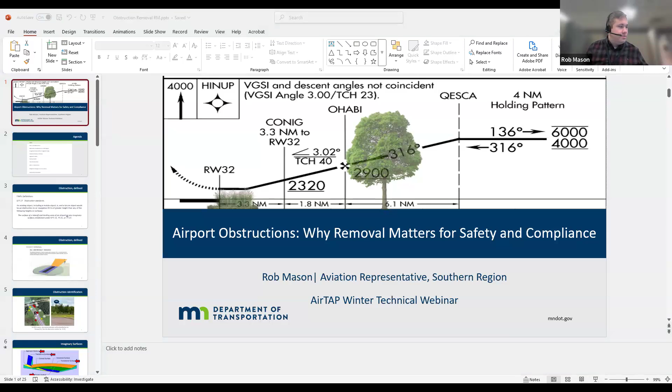So thanks everyone for joining. I'm Rob Mason, the aviation representative for the Southern Region here at MnDOT Aeronautics. I joined MnDOT in June of '24. I'm coming from about 10 years in the classroom as a high school teacher, both in St. Paul Public Schools and at Eagan High School, part of the Eagan-Apple Valley-Rosemount School District, where I taught aviation to the junior and senior level, as well as a freshman course on aviation exploration. So education is a huge part of my background and my journey.

As a pilot myself, it's been a journey of discovery, especially as we get into obstructions. I'll talk about that here in a moment, but super happy to be here. And if you have any questions anytime, drop them in the chat. We will get to them as best I can after the presentation is over.

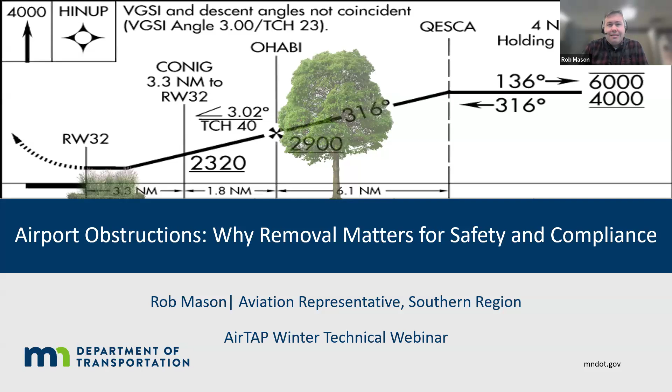So our subject today is on airport obstructions, why removal matters for safety and compliance. I creatively put an instrument approach plate up there with some trees and brush on the approach, because that's what we're talking all about: how to remove these obstructions, the importance of removing them, best practices and how to do those. We'll look at some case studies as well.

So a little agenda here before we get going. We'll talk about what exactly is an obstruction, defining it both in the FAA's terms and for us at MnDOT Aeronautics. We'll talk about how you identify obstructions on 5010 reports that airports receive, the imaginary surfaces and Part 77 approach types, collection methods, and the process we follow at MnDOT Aeronautics when we come out to your airport to visit and conduct a 5010 inspection.

We'll talk about the approach surface, the primary surface, the transitional surface, specific effects of obstructions, and mitigation strategies, as well as a case study and an obstruction control plan.

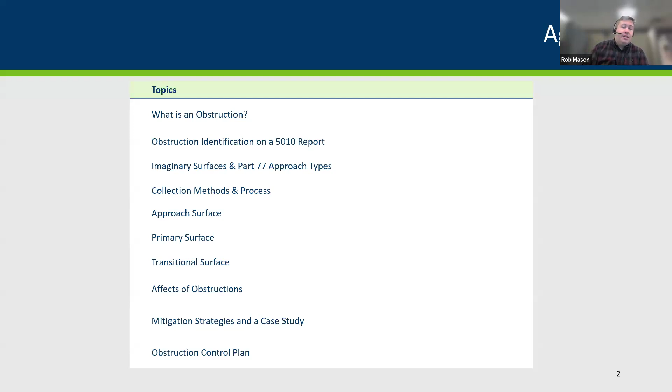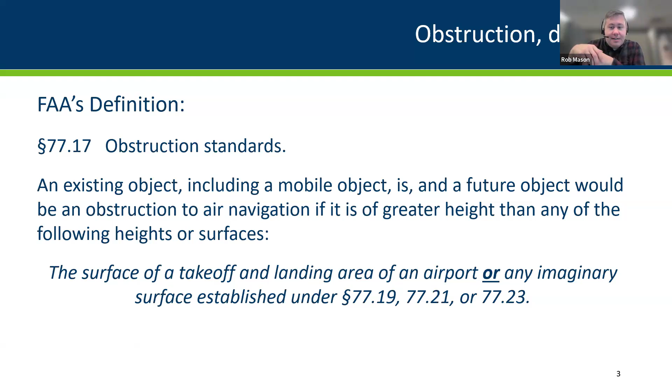So the FAA's definition of obstructions: Part 77 of the FARs says that an obstruction is an existing object, including a mobile object, or a future object, that is an obstruction to air navigation if it is of greater height than any of the following heights or surfaces: the surface of a takeoff or landing area of an airport, or any imaginary surface established under 77.19, 77.21, or 77.23. That's very legalese, so let's think about how we approach it from MnDOT's terms here.

The minimum obstruction clearance, per MnDOT's definition, requires that a structure, a tree, or a mobile object that creates a hazard other than those necessary and incidental to airport operation must not penetrate the imaginary airspace surfaces. If it does, it's technically an obstruction and should be dealt with accordingly. How do we deal with that? We'll talk about that.

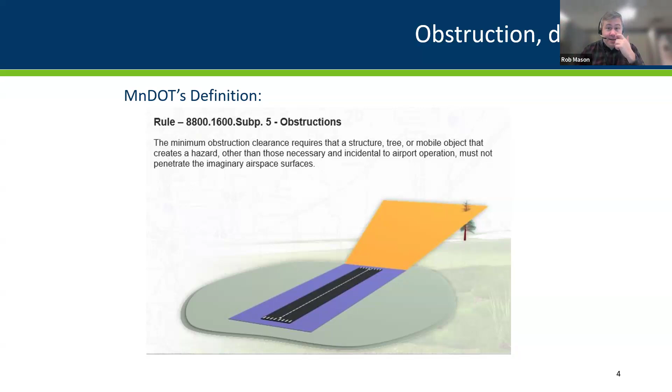To give a little background, I joined MnDOT as a commercial pilot, instrument rated. I thought I was well versed in instrument procedures, and then I got here and realized there's an entire element, Part 77, for the pilots on the call, that we aren't taught anything about - navigable surfaces, any of that. This was a huge learning curve for me, something I had no idea was even out there. This has been personally rewarding for me to learn as a pilot, and I feel it actually makes my flying a little bit safer now that I realize the amount of research, knowledge, and expertise that goes into quantifying and qualifying obstructions and preserving those navigable and imaginary surfaces. So a little background there.

On 5010 reports, when you receive your 5010 report as a Minnesota airport on a 3-year rotation, you're going to see a variety of obstacles and obstructions, perhaps. Every airport is different. But if you do receive obstacles and obstructions identified on your 5010 report, they'll be situated on the second or third page on an aerial view, and you'll be able to look at the specific number of the obstruction, with a color associated with it. So on this particular runway, we're looking at the 14 end. I can see a variety of obstructions - 1403, 1401, 02, 08, 76, and so on.

The colors matter though. Objects in red indicate that the obstruction is an actual penetration - it's penetrating the surface, whether that's the primary, the approach, the transitional, what have you. Yellow would indicate a caution object, meaning it's close to a surface, and if it were a tree, for instance, it will grow and become an obstruction in the coming years. So this is something to keep an eye on. Red would be items that we're going to request correction on immediately following the 5010, and yellow would be those cautions. If it's not an obstruction, like object 14-06, you can see the object was thought to be in the approach surface, but it's actually not. And that happens all the time too.

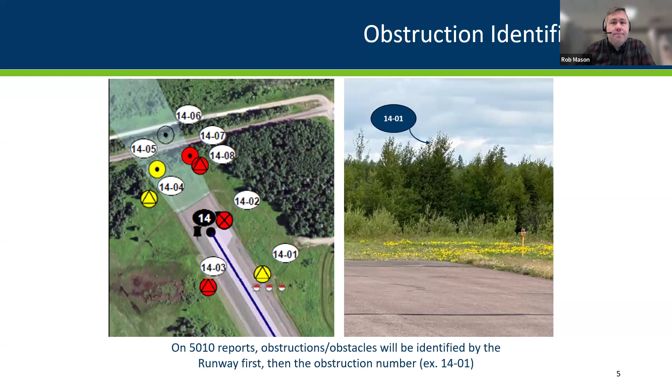A little about the imaginary surfaces - this is a lot, and I am certainly by no means an expert on this. This is one of the areas of development where I've learned a lot over the last 20 months or so of being here at MnDOT Aero. It's fascinating in many ways, and sometimes not so fascinating in other ways.

But when we are coming out to your airport to do a 5010 inspection, we are specifically looking at the primary surface. We're looking at the approach surface, and the items that we may take with our lasers and other collection equipment may look at the transitional as well. We're not paying too much attention to conical. We're not paying too much attention to the horizontal surface.

For those that are unfamiliar, the primary surface is a flat rectangular area centered around the runway, extending 200 feet past each runway end if the runway is paved. Otherwise, it would end at the runway end itself. The width would depend on the approach type, either 250 feet, 500 feet, or 1,000 feet for lower minima and so on.

Approach surfaces extend outward and upward from the end of the primary surface, varying by each runway category - whether it's a precision instrument approach, non-precision, visual, or so on.

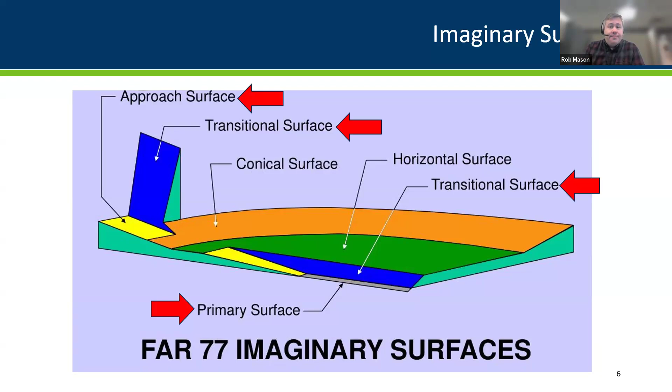And then a precision approach, the most critical, is going to be a 50-to-1 slope, beginning 200 feet beyond the end of the runway, rising at a 50-to-1 slope for the first 10,000 feet, then transitioning to 40-to-1 for an additional 40,000 feet, creating a total length of 50,000 feet out there. So kind of interesting, and something that was a learning curve when I started.

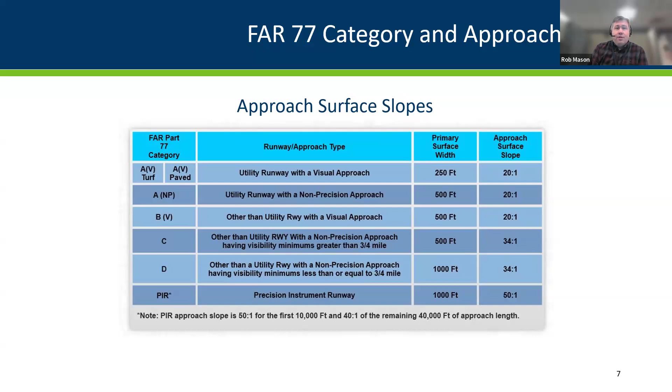This information is readily available. Obviously, we're going to post it as well. Most of you on the call are familiar with Part 77, so we'll leave it at that for now.

We've got our TruPulse 200X, that's what most of us at MnDOT Aero are using as our laser rangefinder. We've got our GNSS device, which in most cases is accurate to within 0.2 of an inch anywhere, as long as we've got all the satellites working. And then, of course, we may resort to a handheld compass because there's nothing like going old school. Even though there's a compass on the phone now, there's nothing like the reliability of a handheld compass. So these are the 4 primary tools we're going to be using when we come out to survey your particular airport.

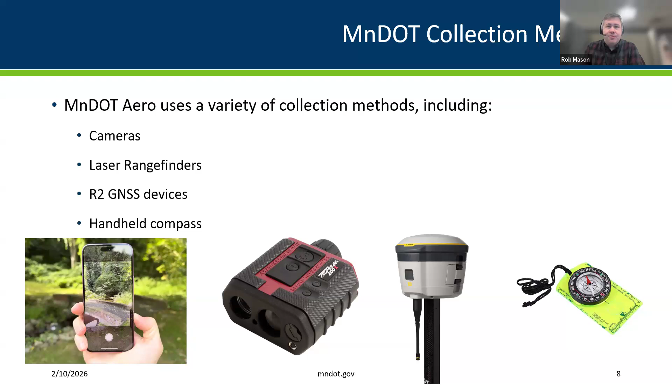Unless there's some specialized equipment needed for any one airport.

The obstruction collection process is about 9 different steps. We set up our instruments when we're about to start hitting some objects, getting everything set up. We're integrating with the MnCORS software, which is the satellite system we use to integrate our GPS, targeting the specific obstruction, whether it's a group of trees, a building, a pole, a parking lot, a car, or a roadway out there.

We'll begin the position recording, height calculation, and distance measurement, all done using the laser rangefinder, integrating with our devices within our phone and our R2 GNSS device, which again is accurate to within 0.2 of an inch, to trilaterate our position anywhere, and then estimate the height of that specific position.

If we've got the height, then we can say this has penetrated X number of feet into the specific surface. When this information comes back to MnDOT Aero and we upload all this stuff to the cloud, we have a team of folks here that process the data.

They integrate all of that data into the 5010 report itself, compare all of the data against known FAR Part 77 surfaces that exist for that airport, and we can immediately say this specific target, with a latitude and longitude for it, is penetrating the surface. We've got a picture to go with it, and we're going to include that in the packet.

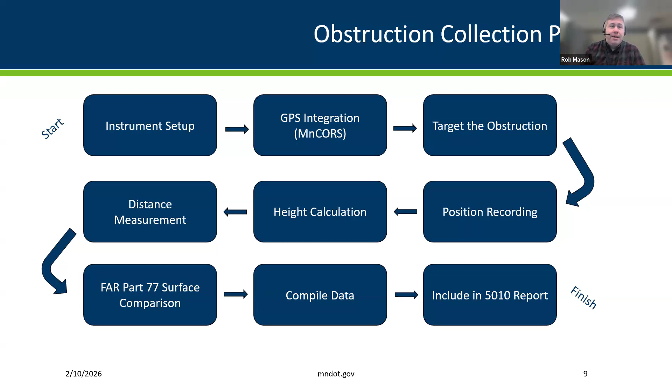Let's talk about the approach surface specifically. Our most common approach surface obstructions are trees, brush, crops, and roads. These are the most common because they occur naturally, or if it's a road, it's built in an area surrounding the airport or approach path. Trees and brush grow over time and can penetrate the protected airspace surfaces if not regularly trimmed.

Crops, especially tall seasonal varieties like corn, can temporarily create obstructions during their growth cycle. So what may be an obstruction in one part of the year is not an obstruction in another part of the year. We see that at so many airports around the state. Roads often run near airports, and vehicles, particularly trucks, can momentarily intrude into those approach surfaces.

That's why we've got those transitional heights we use when we construct these roads, and we assign each of them a value, whether it's a semi-trailer or the height of the highest vehicle that uses the road. We know that and should be able to plan approaches accordingly. These elements are common because airports are typically located in open or rural areas where vegetation and agriculture dominate, and where road networks to the airport are essential for access. There may only be one road, so there may not be a heavy truck road to take - it's all there in one space.

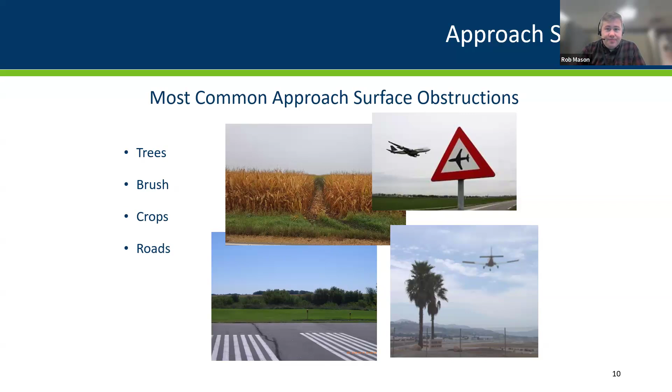So without consistent monitoring and maintenance, these everyday features can easily violate Part 77 surfaces and pose hazards to aircraft operations. So a few photos there - crops, roadways, trees, brush, etc.

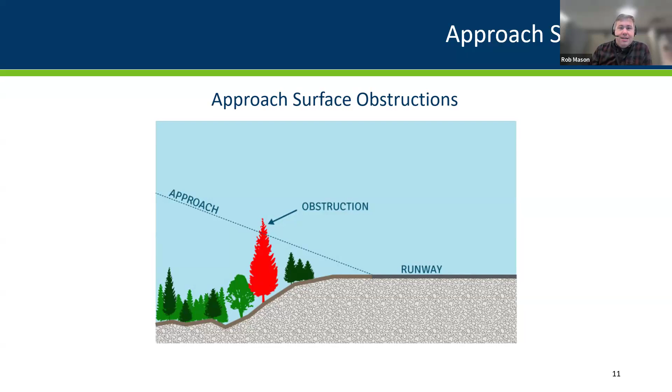This is one more image of an approach surface obstruction here. While the trees at the bottom of that gully area may not be the issue, the one rising pine is, and it may only penetrate by 2-3 feet. We advocate for the airport to go out and remove the obstruction either completely or certainly trim it below its obstructed path.

So why do we need to remove approach obstructions? Well, if an obstacle penetrates the approach surface and we bring it to your attention, and nothing happens as a result, or it's off airport property, or there's a landowner dispute, what can happen? Well, FAA could step in and restrict or cancel approach procedures. They could raise the minimum descent altitude, the MDA, or the DA if it's a precision approach.

They could add a not authorized at night. They could add a circling not authorized, meaning you're not able to maneuver around the airport to get to the other runway. If you only have one approach to one particular runway, they may cut off circling to the other runway, effectively shutting down your operations when wind is going in one direction, which is a significant hampering of that airport. So what's the result of all that?

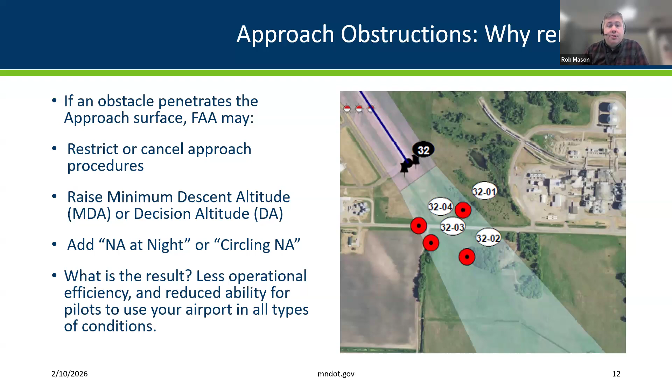Well, it's less operational efficiency. It's reduced ability for pilots to use your airport in all types of conditions. It's critical to remove approach obstructions because they pose a direct safety hazard to aircraft during takeoff and landing. These phases of flight occur at a very low altitude, leaving little margin for error. Any object penetrating the protected approach surfaces can interfere with the required obstacle clearance, increasing the risk of a collision.

Obstructions can also affect instrument approach procedures, limiting visibility or disrupting navigational signals, which compromises those precision guidance systems like an ILS or a localizer. Beyond safety, maintaining clear approaches ensures compliance with FAA regulations, preserves airport certification, and prevents operational restrictions that could limit runway use or raise those approach minimums.

Because at the end of the day, we want our airports to be accessible. We want pilots to be able to use them in all types of weather conditions - maybe not all types, but in most conditions where it's safe to fly. A little bit of rain, a little bit of fog, a little bit of low clouds should not keep a competent instrument pilot from visiting your airport.

However, they're limited by the approach that's given. And if that approach does not allow flight on that particular day because circling is not authorized or it's not authorized at night due to obstructions, that's business that the airport is not going to receive.

This is one view here. Look at that nice clear sky and some palm trees. That looks nice on a day like today. We'd like some clear skies. That's the message to get across here.

Primary surface. We talked a little bit about the primary surface already. Same elevation as the runway. 250-foot width, 500-foot width, or 1,000-foot width, depending on the approach and the runway type. If it's turf, it'd be runway length. If it's hard surface, it extends 200 feet beyond the runway ends.

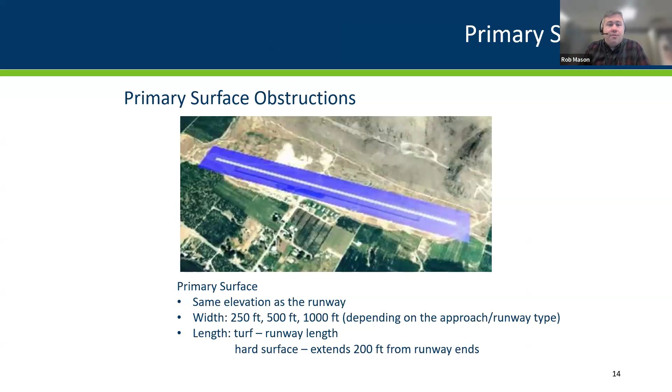Typical primary surface obstructions that we see here at MnDOT, lots. Brush, crops, tall grass, trees, signs, poles, stakes, vehicles. One that I didn't include here, hay bales. That is a frequent and routine offender.

These objects are frequently found near airports because they naturally occur or they're part of everyday infrastructure. Brush, tall grass, trees, they grow over time and can easily penetrate the protected approach surfaces and primary surfaces if they're not maintained. We obviously have seen the same occur with crops throughout the year.

As I mentioned on the approach surface, this is also a primary surface concern. We often see them encroaching into the primary.

And airports that are not willfully allowing this to happen, but perhaps those lines need to be redrawn, or you'd like us to come out and mark some lines, and we're more than happy to do that.

We've got a few airports on the docket for the spring that we'll be visiting to mark some survey lines to show where crops need to stop. Reach out to our office because we're more than happy to make that happen.

We're seeing some other signage there. You can see that radio frequency there in the top right, some frangible taxiway markers, and other runway lighting and things that may be bent or broken. Obviously, that trailer, that would be a no-no as well.

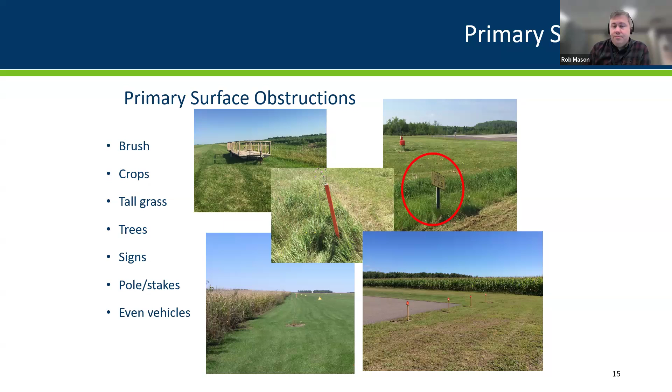So why should we remove these items? Well, if obstacles penetrate the primary surface and it's not mitigated, same situation as the approach, the FAA may increase your approach minimums.

They could mandate a displaced threshold. They could remove the approach altogether, and they could even consider your airport to be an objectionable determination, which would be posted on the sectional and would not be a good thing if the FAA objects to the public airport.

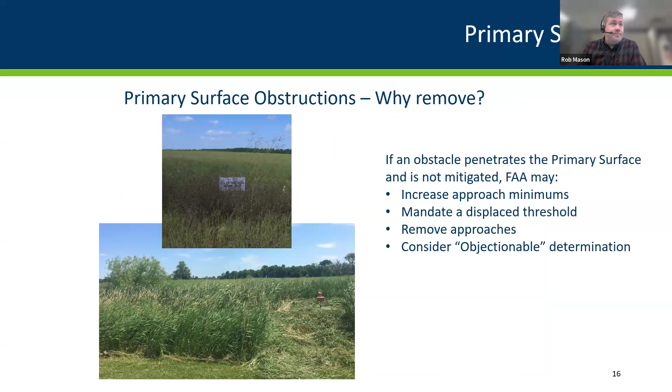Transitional surface. This is the area that we are not terribly focused on here at MnDOT Aero. The FAA could be if they choose to be, but it's going to be the other areas surrounding the approach, abutting up to the horizontal and the conical surface as we looked at on our map earlier.

An example of why we need the transitional area to be clear, as that is oftentimes a prime circling area, and a transitional surface matters.

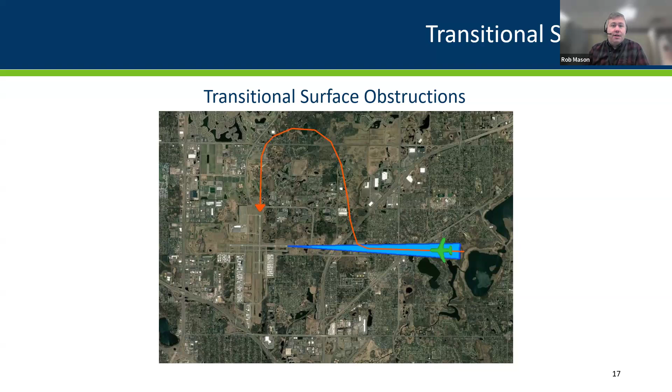So why should we remove items there? Well, too many obstructions in the transitional surface would negate a circling procedure, or it could be not authorized at night. Those two restrictions alone can severely hamper pilot ability to land at your airport.

Any object penetrating those transitional surfaces, trees, poles, structures, they reduce lateral clearance, create collision hazard during low altitude operations. These obstructions can also interfere with emergency procedures, limit visibility, restrict the ability to maintain standard obstacle clearance.

We also see this with EMS helicopters. Clear transitional is very important to them.

And that would contribute to this procedure being not authorized at night, especially if those obstacles are unlit, unmarked, etc.

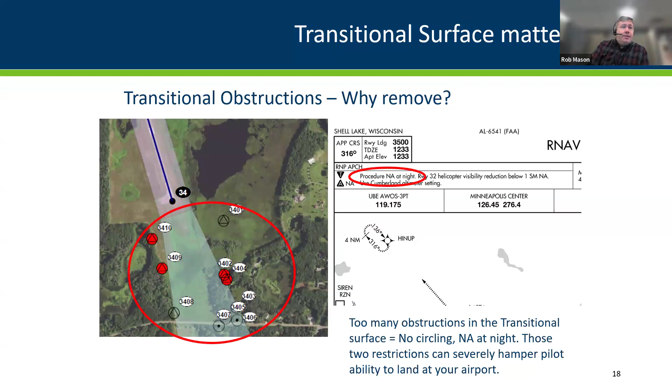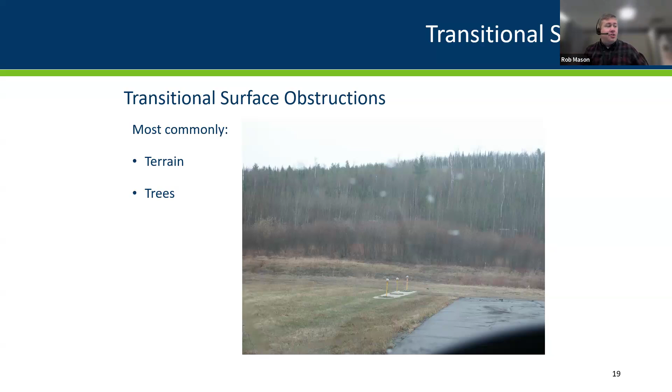On the transitional surface, most commonly here, it's going to be terrain, it's going to be trees. Number one and number two repeat offenders for transitional surface obstructions. We will bring those to your attention on a 5010 report, but we are not mandating any transitional surface removal or action, though the FAA could if they deem it appropriate.

Mitigation strategies: removal is always preferred for vegetation and permanent hazards. Marking and lighting is a strategy as well. For structures that cannot be removed, they should be strongly considered to be marked and lit. FAA has an AC for that—70/7460-1M, obstruction marking and lighting, is the most current version.

However, nothing beats community engagement, proactive outreach and involvement, and conflict resolution for those property owners who hopefully you have a good relationship with, but that's not always the case. In those cases, it's important to stay engaged with those individuals—not knocking on the door and saying those need to go now, but having those conversations begin hopefully before they're identified on a 5010 report. We'll talk about that at the end.

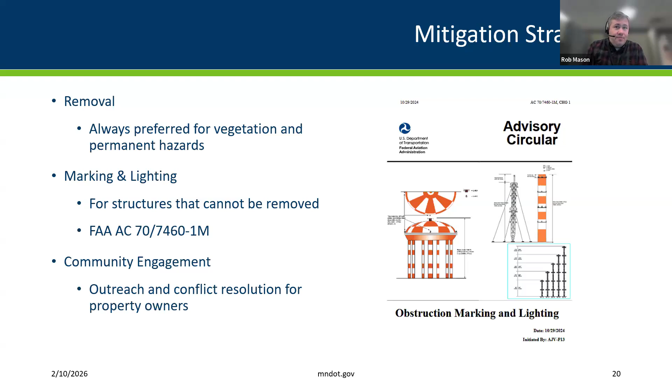One case study here I wanted to touch on—I didn't want to put any Minnesota airport specifically on the spot. So this is from Easton, Maryland, Kilo Echo Sierra, November. They had a problem going on for decades with trees penetrating their approach surfaces to runway 4-22.

Action was taken over a long period of time. They were able to remove 11 and a half acres of tree obstructions on airport property. They cleared 1 acre off airport and approximately 250 trees on nearby roads. The outcome was that they preserved compliance with Part 77, maintained approach surfaces without increasing those minimums, and achieved community engagement, obtaining property owner permission.

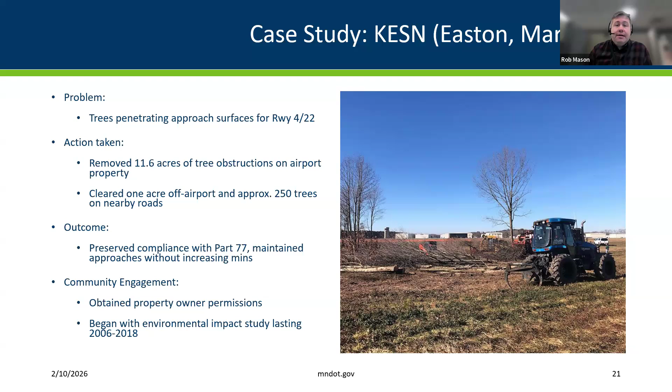This all kicked off with an environmental impact study way back in 2006. That impact study lasted for 12 years, 2006 to 2018, and obviously needed a lot of buy-in from the public.

Some lessons learned from Easton's case: aerial surveys identify obstructions accurately and early, so the importance of early surveys matter. Multi-year planning, environmental and legal considerations take time—sometimes a lot of time. Stakeholder coordination—property owners, airport authority, MnDOT if there's partial funding from us, and environmental agencies—must be involved.

There's also a significant safety impact. Obstruction removal prevents accidents and maintains operational efficiency. It's good for everyone. Unfortunately, that's not always seen that way by certain members of the public, especially when it's on private property. But the benefits of the airport need to be accurately explained and articulated to those property owners as well.

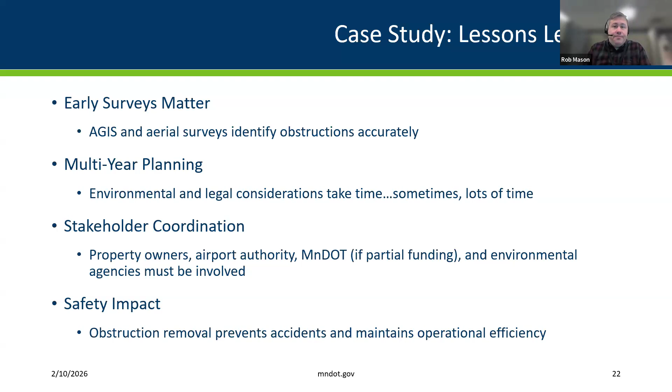Removal of these trees is easier said than done, we know that. This involves a host of individuals all with their ducks in a row to make this happen: property owners, easements, zoning ordinances, environmental assessments, multiple surveys, funding on the CIP, and then MnDOT assistance.

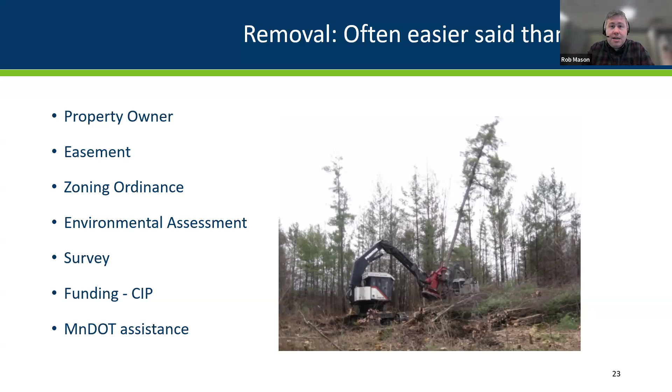And assistance is out there—please let us know. We've got a few projects right now in the works with mitigation around different Part 77 surfaces. If you want to talk about your specific situation, please reach out. I cover the South. I've got Dimitri Foster with me and Phil Anderson as well, plus Tim Jarvis, Jim McCanny, and Jared Waddell. We are here for you and would love to help.

Obstruction control plan: give thought to how you'll remove obstacles before they become obstructions. Meaning, these obstructions don't just come out of nowhere—these are typically predictable maintenance items. Trees continue to grow. You may already be aware of repeat offenders in terms of vegetation around the airport, places you are out constantly. You know your airport better than anyone.

This involves routine self-inspections. Use your airport's 5010 inspection as a verification tool that you're doing the best you can in removing those obstructions—don't use it as an identification tool. Don't wait till every 3 years to revisit and determine what needs to be cut. Stay active and stay vigilant.

Part of the relationship that we want to maintain here at MnDOT Aero and our 132 public airports is that we can come out and visit your airport anytime you'd like. We'll get time on the calendar, we will come to you, more than happy to bring our equipment and set the laser on as many obstacles as you'd like. We'll kick that back to the GIS crew here, and we'll map that out, getting an exact latitude and longitude of those specific obstructions you need assistance with.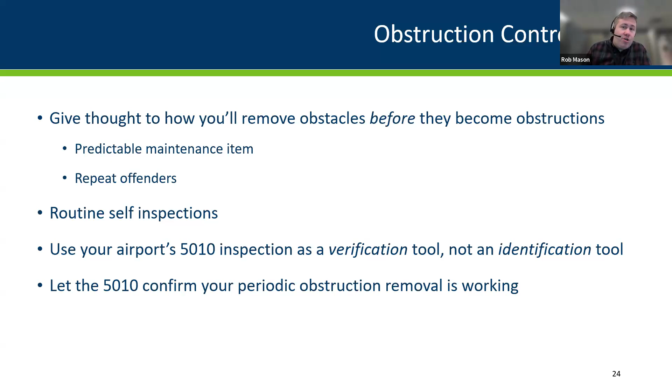Let the 5010 confirm that your periodic obstruction removal that you're doing on your own is working. Don't wait for us to bring it to your attention.

And with that, we have come to the end. I hosted last year's Snow and Ice, and as I watched it back, I realized I talked way too long—that comes from the teacher in me that sometimes doesn't know when it's time. So I decided to be a little bit quicker on this one. With that, I'll take any questions you have. Thank you so much.

Questions, comments? We have one in the Q&A asking about LiDAR systems—would you be interested in having a LiDAR system? I don't know the full context of that question; I'm assuming we're talking LiDAR in terms of obstruction identification. Please reach out to me because that piques my interest. David, thank you, I'm going to follow up with you on that. I had to figure out how to open the chat here. Yes, that's something we'd certainly like to be talking about.